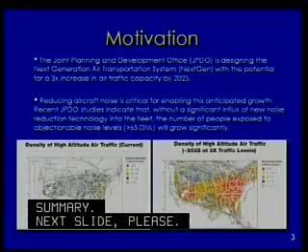In the way of motivation, as you well know, JPDO is charged with designing the next generation air transportation system, NextGen. And one of its goals is the potential to increase the capacity of air traffic by threefold. Now, clearly, an important enabling technology for that is reducing aircraft noise to enable this growth. Without it, in fact, JPDO studies indicate that the number of people exposed to objectionable noise in and around airports will steadily increase.

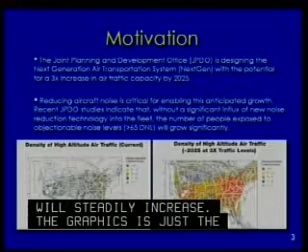The graphic is just a visual representation of air traffic density. On the left is the current picture, on the right is if we have the 3 times growth. All of these planes in the air must take off from an airport near you and land in an airport near you.

So you see that noise is going to be a critical issue. Next slide, please. Before going on, because we'll often be talking about noise levels in dBs, we thought it might be important to discuss what we mean. And because there is some subjectivity in noise, very well-defined metrics have been identified and enforced that define the effect of the noise on the community.

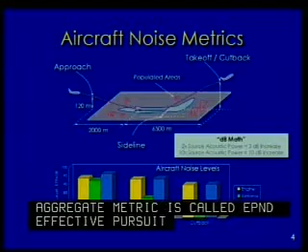They take into account the spectral content, the annoyance rating, duration, and this aggregate metric is called EPNdB, Effective Perceived Noise Level, dB. For the purposes of community noise regulation, there are well-defined so-called certification points that any commercial aircraft flying must meet in order to be certified. And these are so-called approach for landing, takeoff / cutback, and sideline. There are precise trajectories, distances, and durations for these that every aircraft must follow. And the noise is measured, expressed in dB.

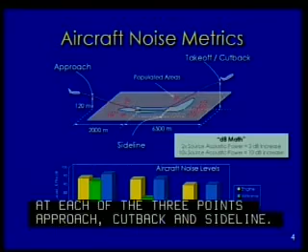The chart on the bottom, concentrate on the blue bars. Those are really representations of what, say, would be measured at each of the 3 points: approach, cutback, and sideline. In the subsequent charts, we'll often talk about cumulative margins, or margins, more specifically. What we mean by that is for every class of aircraft, there are FAA rules, actually ICAO rules, International Civil Aviation Organization rules, that set limits on the noise that a given aircraft can make.

The margins are what the measured level of that particular aircraft is at each cert point, subtracted from the noise regulation level. Generally, you want to be below that, so that's typically a positive number. And then you do that for all 3 certification points. You can express that as a cumulative metric. Often that's what is done. But sometimes for the purposes of identifying trends, you could also look at an average. And both the sum and the average are straightforward arithmetic sums of the dB levels.

An important thing to remember about dB is that it's a logarithmic scale, which means if you double the acoustic power, you double the number of engines, the noise will go up by 3 dB. If you want it to go up by 10 dB, you need 10 times the power. So clearly, to make dramatic changes, you need to do a lot, and the reverse is true also. To reduce significantly the noise, you need to do a lot of work. Next slide, please.

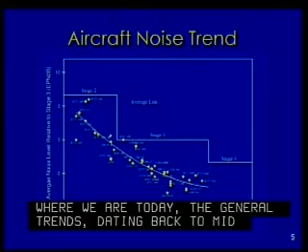This graphic is meant to show where we are today, the general trends, dating back to mid-60s to about mid-2000. Not every aircraft flying is posted there, but a representative set is. And the vertical axis is this average margin relative to stage 3. The stages are the noise regulations, and stage 3 was really the ruling rule from the mid-70s to about mid-2000. Clearly, significant progress has been made over the years, and airplanes are much quieter than 20 years ago. But also, it's clear that the trend is leveling off. And why is that? Next slide, please.

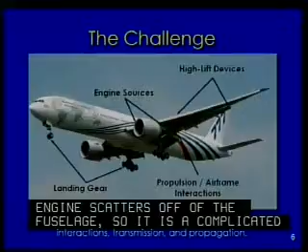One main problem is that it is a very complicated problem. Individual sources are highly complicated, involving interactions of flow with every part of the aircraft that makes noise. And then the complicated interactions that the sources could have: the engine slung under the wing, the jet plume is affected by the wing downwash. The noise radiated from the engine scatters off of the fuselage. So it is a complicated problem, and so it's a worthy challenge to rise up to. I think the caption at the bottom really captures it. The aircraft noise is a complex amalgam of sources, integration, interactions, transmission, and propagation.

Next slide, please. Against this background of where we are, the challenges we're facing, the Subsonic Fixed Wing Project, part of the 4 fundamental aero programs, has set itself goals to enable the JPDO vision. And there are goals in noise, in emissions, and in performance. And we have identified two generations of aircraft. If today's aircraft are labeled Generation N, then N+1 is the next generation. Still a tube and wing, would look like a, say, 737, but more advanced. And then the follow-up generation, N+2, is something that would probably be radically different.

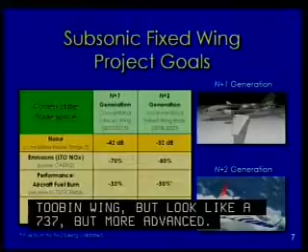I'm not going to talk about all the goals of the Subsonic Fixed Wing Project. We'll just concentrate on the noise. But the point to make here is that the levels, the targets you see, whether it's for N+1 or N+2, are meant to be the corners of the trade space.

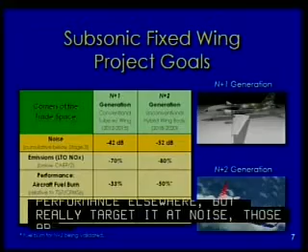If you were to optimize an aircraft just for noise, have acceptable performance elsewhere, but really targeted at noise, those are the targets we think are achievable with the technology that is already in the pipeline and what is over the horizon. These are cumulative margins relative to stage 3. So let's just look at an average, which means for N+1 we're looking at 14 dB and for N+2 17 dB. Next chart, please.

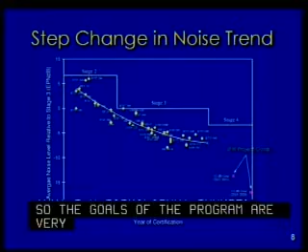They're plotted against the current trends. Clearly a step change in the way we do things. And remember the dB math, that's a significant change. So the goals of the program are very aggressive, but I think that's the kind of thing that is needed to achieve the JPDO vision. Next slide, please.

A little bit more detail. This is an in-house NASA study. The orange bars are margins of a best-in-class, if you will, single-aisle aircraft, something like a 737. In fact, this one is an A320. It shows where it is today relative to stage 3 and on a cumulative basis.

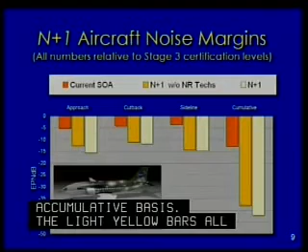The light yellow bars all the way to the right are our vision of the replacement for the 737 or A320 that brings the best of the technologies available today or in the pipeline. And you see that it's a significant change.

Technologies having to do with better airframe design, so-called ultra-high bypass ratio cycle engines, and some additional airframe and engine noise reduction technologies. Together, the so-called N+1 achieves the 42 dB goal. In fact, the goal was set on the basis of this study. Next chart, please.

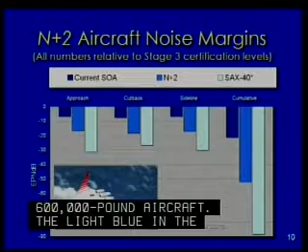Somewhat more nebulous is the N+2 design study. The dark blue, the current state of the art, is a 777, a 600,000-pound aircraft. The light blue in the middle is our vision of a so-called hybrid wing aircraft that would have significant, again, improvements over N+1, cumulatively about 52 dB.

We'll talk about the hybrid wing in great detail later, but principally it is the way the propulsion system and airframe are integrated and the significant shielding that you would get from that integration that buys you the benefits.

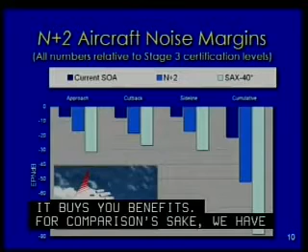For comparison's sake, we have also plotted the SAX-40. That was the aircraft that was designed by the University of Cambridge and Massachusetts Institute of Technology consortium over the course of 3 years, what they called a functionally silent aircraft that would be blending with the background noise. So it was highly optimized for noise.

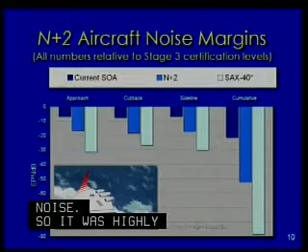And there were tremendous technical challenges that had to be overcome. They were way down there at about 86 dB cumulative. They had a much longer time horizon than what we are proposing to do. So we are naturally a little bit more conservative, and hence the goal is at 52. Next slide, please.

Our research plan, this is really kind of a common template between all fundamental aero programs, perhaps the entire aeronautics program. It is a layered approach that starts at the basis with the fundamentals, really understanding the physics of the problem and addressing the issues that one has, whether it's prediction, mitigation, or diagnostics for that matter.

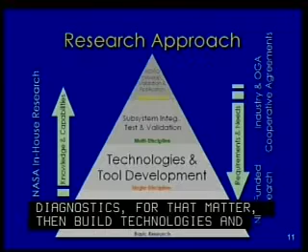Then build technologies and tools at the discipline level, in this case acoustics, that address those needs, and then push that up to the next level, integrate with multiple disciplines, and validate primarily the prediction tools that we are developing, but also technologies, and ultimately lead to a multidisciplinary analysis and optimization. The knowledge and capabilities flow up, the requirements and needs flow down, and ideally this is a continuous loop so things improve constantly.

The research effort is too big for just one entity, so in-house we do what NASA does best, fundamental, leading edge research, but we also work with our industry and academic partners to bring in the talents and the capabilities that we may not have in-house. So we have NRA-funded research, primarily with universities, but also with some industry. And we also have developed and continue to develop partnership opportunities with industry and other government organizations.

And while NASA in-house research is really at all layers, the NRA-funded research tends to be at the fundamental and the discipline level, although it can creep up to the next layer. And the cooperative agreements are primarily at the multidisciplinary and system level approaches. Next slide, please.

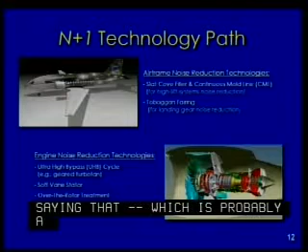Okay, we talked about the goals, 42 dB relative to stage 3. Here's the technology path. Basically taking the best airframe design today, which is probably a 777 with the best high lift system, and scale that down to the 737 class, assuming you can maintain the noise benefits of that. Add some technologies, some of which we'll talk about, to further mitigate noise from the high lift system, from the slats, from the flaps, and from the landing gear.

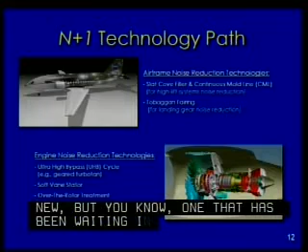Then mate that with a new propulsion cycle. Well, not new, but one that has been waiting in the wings, but I think it finally has its time in the spotlight. That's the ultra high bypass engine. Basically, you slow down the fan tip speed. This way, you reduce fan noise. You also reduce jet exhaust velocities, a notoriously difficult problem to mitigate. So you get significant benefits from the cycle alone.

But for insurance purposes, we also add some fan noise reduction technologies, specifically, in this case, soft vane stators and over-the-rotor. We'll talk about the soft vane stators later. Both of those technologies, in fact, have NASA patents pending on them. So this is our technology path for N+1. Next slide, please.

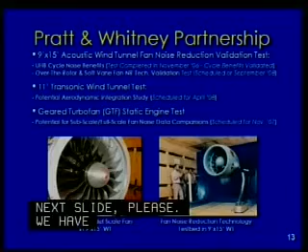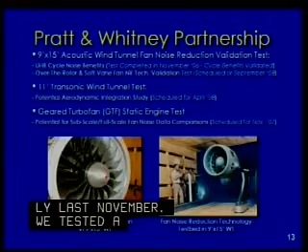We have formed partnerships in the past, and we are continuing to develop partnerships now with industry partners who can help us push the front along on these technologies. Specifically on the propulsion side with the ultra-high bypass, we had studies that we did jointly with Pratt & Whitney. Last November, we tested a scale model cycle of their version of a UHB, which is called the geared turbofan. It was tested at subscale, in fact 22-inch scale in wind tunnel, and basically demonstrated the noise reduction benefits of

that cycle. We are planning next September to do the test of the over-the-rotor and the soft vane technologies to buy us the extra margin we want to have with the fan noise reduction. There's potential now to work with Pratt & Whitney, still in negotiations with them, to do some integration studies in the wind tunnel. And also they have on schedule to do a ground test of the fan system for the geared turbofan. So there may be an opportunity for us to work with them and compare the scale model noise data with the full scale to see if that connectivity is there the way we think it is.

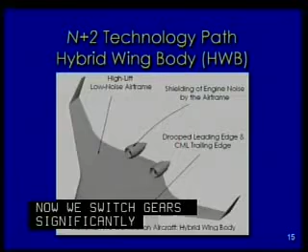Next chart, please. Now we switch gears significantly here to the N+2 generation of aircraft, envisioned to be hybrid wing-body concepts, and only one notional concept here is shown. And compared to the conventional configuration that you've seen pictures of up till now, this represents a paradigm shift in what is possible with aircraft noise. Most dramatically, you see the engines can now be moved from the bottom of the aircraft to the top. And this introduces the potential for shielding of propulsion noise sources.

So clearly, with the engines in the location that they're at now in this graphic, you see the potential for large shielding of the forward radiated propulsion noise sources. It'll be a challenge to obtain shielding of the aft radiated sources, and so that is going to be a large focus of continuing work. It also changes the way the aircraft flies and the way the high lift system is integrated into the aircraft because of the blended wing body shape.

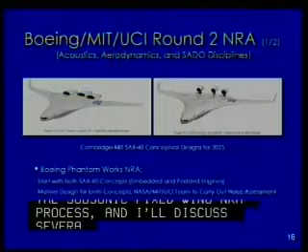There's that blending of the airframe components as well. Next chart, please. We've just concluded round 2 of the subsonic fixed wing NRA process, and I'll discuss several of the awards there that are very important in the acoustics area and directly related to this N+2 technology path.

The first award that was just completed negotiation and awarded just 3 weeks ago is led by Boeing Phantom Works. They have MIT and University of California, Irvine as subcontractors. And we're beginning to integrate a large team from NASA in both the acoustics disciplines, the aerodynamics disciplines, and the system analysis and design optimization discipline as well.

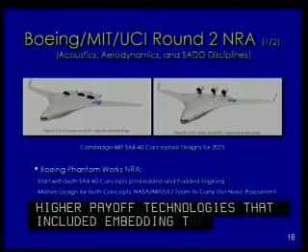The Boeing team was able to take advantage of that same Cambridge MIT Institute work that was done on the Silent Aircraft Initiative over a period of 3 years. And they'll start with these 2 aircraft concepts that are shown. On the left, you see the SAX-40 design with the higher risk, higher payoff technologies that included embedding the engines in the airframe. On the right, you see a lower risk, but still a dramatic step change in technology and noise reduction potential. It's the podded version of this aircraft.

The Boeing team will start with these 2 concepts, and over the first year, they will go into much greater detail of the design of these concepts, closing out the aircraft design in 1 year. They will look at technology suites to add to these aircraft, and by the end of the first year, working together with NASA, they will plan in year 2 and year 3 a large-scale, high-fidelity wind tunnel test.

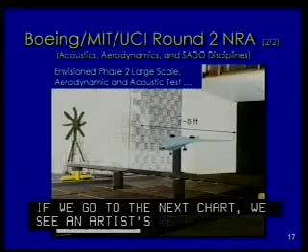If we go to the next chart, we see an artist rendering of what is envisioned for that phase 2 large-scale, high-fidelity wind tunnel test for both aerodynamic as well as acoustic characteristics of this type of aircraft. We see the 14 by 22 wind tunnel with this concept ready for testing there. We have far-field microphones deployed, the latest phased array technology to image the acoustic sources.

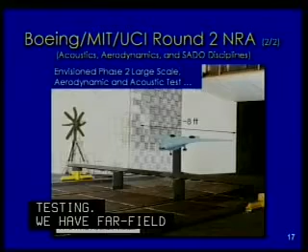This is going to be a big challenge. As we bring the airframe noise sources down and the engine noise sources down, it's going to take a greater resolution of measurement technology to properly characterize these. And so this is envisioned for the phase 2. It'll occur in 2010 if we proceed to that stage. Next chart, please.

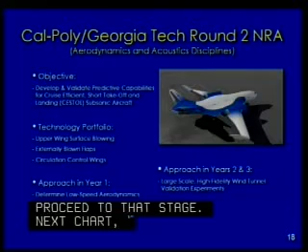Along a parallel path, a second team led by California Polytechnic with Georgia Tech as subcontractors are also proceeding. In this case, they're going to be focusing on that metric that was listed in the subsonic fixed-wing goals for field length, going after the cruise-efficient, short takeoff and landing subsonic aircraft concept. And you see, again, a rendering of that type of a concept. They'll look at the technology portfolio, including upper surface blowing, externally blown flaps, circulation control wings that enable this short field takeoff.

And again, in year 1, they'll be putting together the tool set to design and optimize this type of configuration. A key is going to be how they predict the acoustic characteristics of these technologies integrated into a complete aircraft concept. And then, like the Boeing-led concept, in year 2 and 3, they'll be putting together plans to do a large-scale, high-fidelity wind tunnel test of this type of a concept. In this case, they're aiming towards the National Full-Scale Aerodynamic Complex at the NASA Ames site.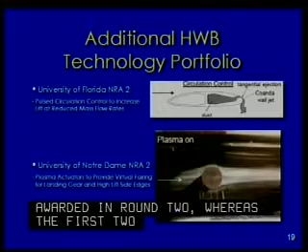Next chart, please. A different set of concepts were awarded in round 2. Whereas the first 2 focused on the complete aircraft concept and technology, these are going to focus more on individual technologies, which we think are very promising and can really change the way aircraft are designed and flown and impact the acoustic characteristics. The first is at University of Florida. It's going to be focusing on circulation control.

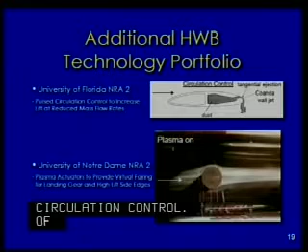Of course, this technology can dramatically increase lift coefficient and therefore enable lower speed takeoff and landing, and also increase the separation between the aircraft and the community below, and change the airframe sources as a result of that. In particular, they're going to be looking at pulsed circulation control or unsteady circulation control, which can increase the lift while reducing the mass flow requirement through the circulation control jet.

And of course, they're going to be developing a very high quality aerodynamic and acoustic data set, which has not been done before. And that's going to be a very important step forward in understanding this technology. The second one will be done by University of Notre Dame, and it's on plasma actuators.

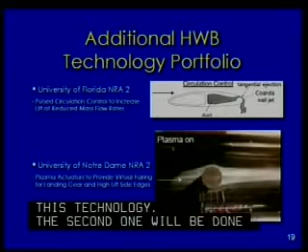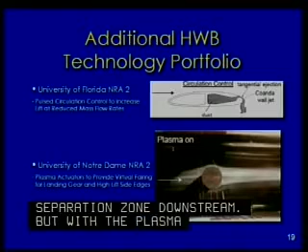You see there in the photograph to the right a cylinder in a wind tunnel, and you see smoke visualizing the flow field, flow from left to right. Now normally, flow over a cylinder, you would see a large separation zone downstream, but with the plasma actuators on, the flow is, you see, smooth over the cylinder, and there's no large separation region.

And so plasma actuators hold the promise to provide virtual fairings for airframe noise components like the landing gear and the flap side edges. We think it's, again, a very promising technology which has multiple applications, and we're looking forward to this work as well. One of the keys here is to push the technology of plasma actuators to higher Reynolds number, more realistic applications. Next chart, please.

So we're very excited about those NRAs and the potential for what they can do in the N+2 category. But now I'll hand it back to Dr. Envia for our in-house research. Thank you, Russ. Russ did a pretty good job of covering some of the partnerships we have formed and some of the key NRAs that address the N+2 technology development. Equally important, of course, is what we do in-house, and the kind of work that NASA is uniquely capable and qualified of doing.

Our in-house research, as I mentioned earlier, it's a formula that has worked well for us in the previous program, so we decided to stick with it, which is a three-pronged approach to addressing noise research as it relates to aircraft. So the diagnostics, understand what is it that you're trying to model and mitigate, then bring to bear noise prediction capability that might exist or you develop. And so it's a combination of improving existing capabilities, but also developing new ones as need arises.

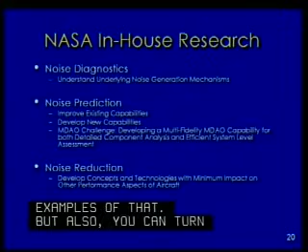If you're studying a specific component and you can afford the computer resources and time, you can study that in a great deal of detail, and we'll show some examples of that. But also you can turn the dial to something that perhaps is not as high fidelity but is efficient, so you can do a system level analysis and you can study a number of systems in reasonable amount of time.

Ultimately, of course, the diagnostics and prediction are going to help us devise noise reduction technologies that, again, the idea is for them to have minimum impact on the other performance aspects of the aircraft. We have traditionally worked these in a synergistic manner, so there is a give and take and a continuous improvement loop between these. Next slide, please.

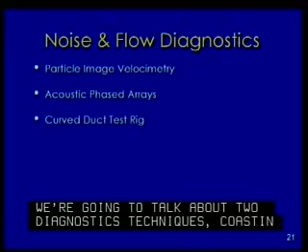I'm going to systematically go through and just show highlights. Just like the entire presentation, this is really only a highlight of what we do, but I think these are what NASA is doing very well. In fact, in some cases, at the leading edge of that work. I'm going to talk about two diagnostic techniques, so-called particle image velocimetry and also acoustic phased arrays, but also talk about a new capability we're developing at NASA to really understand liner physics.

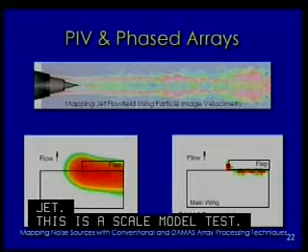Next slide, please. On the PIV, particle image velocimetry and phased arrays, the top graph shows an actual visualization of the turbulence in the jet plume of a coannular jet. This was a scale model test. And basically, by seeding the flow with particles that are small enough that they don't affect the flow, but are large enough to reflect laser light, and then by very complicated image processing, you can basically develop a snapshot in time of the intricacies of spatial distribution of a major source of, in this case, jet noise, which is turbulence.

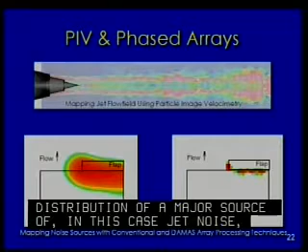And this technique is now pushed into the time domain. There have been recent tests at NASA where you can actually sequence this in time and trace the evolution of turbulence in time, which is equally important in jet noise research. And we have also attempted to do PIV for turbomachinery behind fans to understand the evolution of turbulence from the fan rotor as it impinges on the stator. On the bottom is a graphic of another area that NASA is very good at, phased arrays.

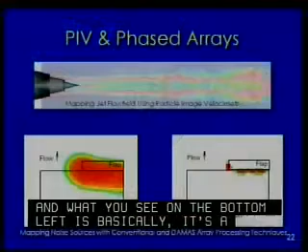And what you see on the bottom left is basically a main wing and a flap, and the noise source is the discontinuity between the two, the edges that flow gets into, and you get vortex shedding and noise production. Using conventional methods of so-called beamforming, which is the analysis of the phased array data, which is, after all, an acoustic camera, it is not very clear what the primary source is.

But a method developed at NASA called DAMAS, the deconvolution method, actually filters all the extra noise out, and you can focus on the real source, which is the flap side edges.

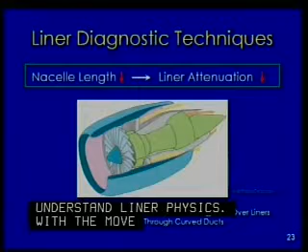Next slide, please. On the diagnostics, I'm going to talk about now a set of unique capabilities we're developing at NASA to really understand liner physics. With the move toward larger diameter engines, UHBs, the nacelles need to be shorter because of the weight consideration. That reduces the real estate that you have to apply liner. So understanding the liner physics so you can optimize it, take advantage of the minimized real estate is very important.

What we are doing in this program, we are developing two sets of unique capabilities to address grazing flow effect on the liner. By that I mean you can measure the liner in static condition. It will have certain performance, certain impedance characteristics. You put flow over it, things change. And of course, there's flow inside the engine, so it's important to understand the effect of the grazing flow.

We're developing a capability, actually two capabilities, that address measuring the performance of a liner subject to grazing flow for realistic flow conditions, realistic frequencies, and essentially realistic scale. One, the so-called grazing flow impedance tube, is a facility that allows you to really, under very controlled environment, look at the performance of the liner, subjected to different boundary layer growth, send acoustic waves from upstream or downstream, and understand what the liner is doing.

What this capability does not afford you is to put realistic mode content, the modes inside the engine. These are acoustic components from the sources. For that, we are developing a different capability, the curved duct test rig, which allows you to go the next step, put more realistic modal structure for the noise. Of course, the conditions are not as controlled as the first facility, but together they provide a powerful capability. Please roll the tape.

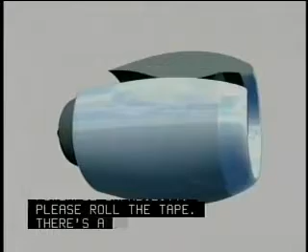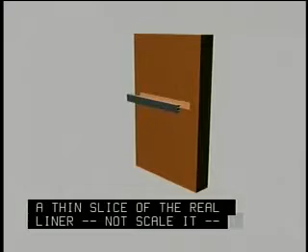There's an animation of the two facilities. First, typically where you would put liners are in the inlet or in the exhaust duct and the bypass duct. So the idea here is it's a graphic representation of taking a thin slice of the real liner, not scaled, and then put that in the grazing flow impedance tube for testing purposes. The black knobs upstream are speakers. You can dial in the kind of noise feature that you want, and the wires represent leads to the microphones where you make measurements. You can interchange different pieces to control the boundary layer growth.

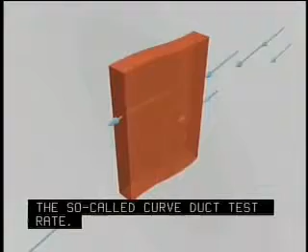That's the grazing flow. The one that takes you the next step up is the so-called curved duct test rig. Basically take the real section of, say, a full scale for a regional jet. Just unroll it, but maintain in the axial direction the curved nature of the duct. Then you can put the samples of the liner with some foam backing in there and make detailed measurements under realistic flow conditions and realistic frequencies. Both of these facilities are essentially unique. My understanding is that you have external customers already lining up to make measurements in those.

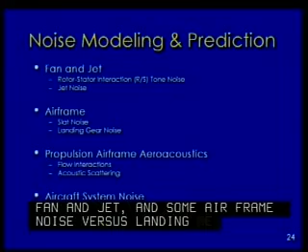Next slide, please. On the modeling and prediction, I'm going to again step through only a handful of areas, but I will sample capabilities that are purely computational, capabilities that are a hybrid between computation and analysis, and capabilities that have to do with basically empiricism. We'll talk about the top two bullets about component prediction, fan and jet, and some airframe noise sources like slat and landing gear. We'll talk about propulsion airframe aeroacoustics, two kinds of interaction, flow interaction and acoustic surface interaction, scattering. And then we'll close with the real challenge, aircraft system noise prediction.

We'll walk you through the current capability, Aircraft Noise Prediction Program, ANOPP. You probably have heard that acronym before. And then we'll also introduce the future ANOPP 2, a new framework that allows this variable fidelity capability that we talked about earlier. Next slide, please.

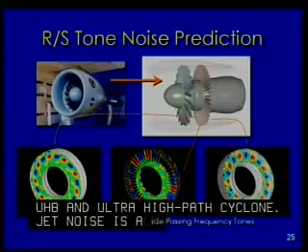Here's an example of basically a direct computation of fan noise. For a UHB, an ultra-high bypass cycle, jet noise is almost a non-issue. So fan noise is the dominant source. So understanding fan noise is critical. And here's a calculation that takes into account the real geometry of the rotor, real geometry of the stator, and gives you essentially a field solution. You know the noise field everywhere.

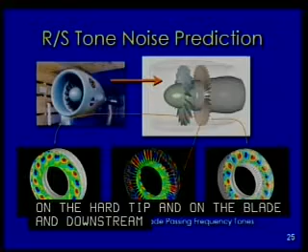On the left is the sound field upstream of the stator. That's the brown blade row. In the middle is the unsteady pressure distribution on the hub, tip and on the blade, and downstream is the wave propagating downstream. If this was animated, these patterns would be rotating and corkscrewing forward or aft. These are the so-called modes that we talked about earlier.

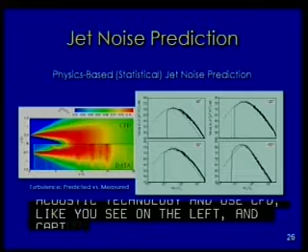You basically do a computation using CFD, like you see on the left, and capture the source of noise, namely turbulence, distribution of turbulence kinetic energy, integral length scales, and what have you, and then use that as input to a very rigorous analytical model of the noise that solves for the noise radiation given these sources. What you see there on top is the CFD prediction for turbulence in a jet plume, and the bottom is the data. Obviously improvements need to be made, and they continue to be made.

On the right is the prediction. It's a bit difficult to see, but the idea is that the predictions are pretty close to the measurement. The angles are measured from the axis of the jet. 180 degrees is downstream in the jet plume, 0 degrees is upstream. So you don't really expect to get a very good comparison upstream because there is shielding from the nozzle and all that we're not modeling here. But downstream, where we think this should work, it does work.

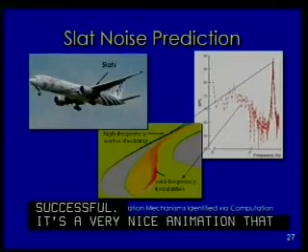By knowing what the source is, you can design noise reduction technologies that address those specific sources, and they've been very successful. Unfortunately we don't have it here, but there's a very nice animation that shows the so-called slat cove filler that mitigates the slat noise. But here's an example of the synergy that we talked about.

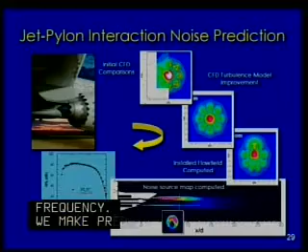That whole circuit there is a very fruitful interaction between experiment and prediction capability, but it's also intensive. It takes about 2 years to go through that circuit the first time. Now we move on to making improvements in the noise prediction method so they can handle greater range of directivity, greater range of frequency. We make prediction improvements in the basic flow field measurement as well. And then downstream, we look at making use of unsteady methods to improve certain regions of the flow field. So this is, again, a snapshot of 2 years that we will then build on in the future.

Next slide, please. That was one example of a flow interaction. Another type of interaction is acoustic scattering, where propulsion noise, for example, is produced at the source and then it radiates out of the engine and it begins to interact with an airframe, and it can either be reflected or it can be shielded. And so in this image here of a prediction being developed of an N+2 configuration, you see the propulsion noise sources being simulated on top of the airframe and then interacting with the airframe, being shielded by the airframe.

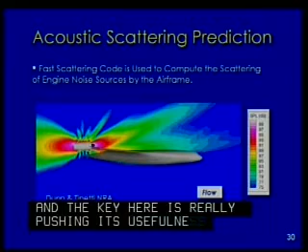This is being done on an NRA, round 1 NRA. It's a fast scattering code that is under development. And the key here is really pushing its usefulness to a broader range of frequencies and really working on the computation time. It's still a very computationally intensive process, and to make it more usable, more realistic, we've got to work on that computational requirement. Next chart, please.

You've seen now the components being predicted and some of the interactions being predicted. Now, the next challenge is to integrate them into a complete aircraft system noise prediction method. ANOPP, Aircraft Noise Prediction Program, has been a NASA-developed system noise prediction code for over 30 years. And it has been a workhorse, very good at what it does. So I'll say a few words about that and primarily focus on the step change to what we need to go to in the future, all right? And hence the name ANOPP 2. And of course, as we get to this aircraft system noise prediction capability, that's our direct link to MDAO.

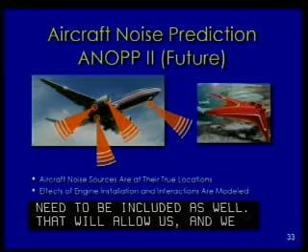That will allow us, and we must, venture outside then of the experience base. Again, the ANOPP paradigm was based on the conventional configuration and was developed to be quite good at that configuration. But it's largely for evolutionary changes of that configuration. To break out of that paradigm needs a new aircraft system noise prediction method, ANOPP 2. Now we'll go into a little more detail in the next chart as to this paradigm shift.

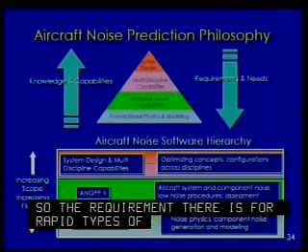But if we're going to address these types of requirements, we need the high fidelity codes or the products of those high fidelity codes, which are at the bottom, the research codes. These are of increasing fidelity. And so ANOPP II is going to have the very tough job and challenge of being that middle in transferring that knowledge and that high fidelity prediction capability into a usable tool for system noise design. Next chart elaborates more on the magnitude of this challenge.

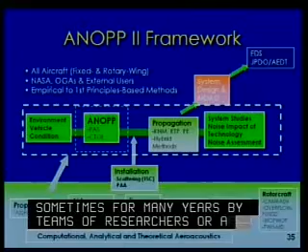On the bottom there, the half is that wide base, the foundational capability. These are most, not all, of our high fidelity research codes that have been under development sometimes for many years by teams of researchers, or are new codes that are in the process of being developed. These codes, again, are typically research codes, high fidelity, large computational resources. You see there in the middle, beginning that bridge, the installation effects that are being addressed by sets of codes.

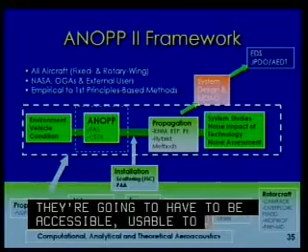In the middle there, around the porous boundary, the dashed boundary, is the framework for ANOPP II. All of these high-fidelity codes are going to be linked into that ANOPP II framework. They're going to have to be accessible, usable to that ANOPP II framework. ANOPP, the old ANOPP, still resides within that ANOPP II framework as a low-fidelity component of ANOPP II.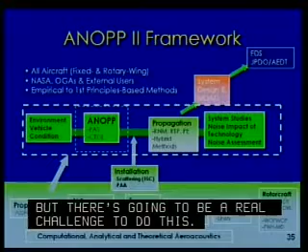But the installation effects will be added, the improved propagation tools will have to be added to work in this framework. But it's going to be a real challenge to do this. And again, to provide a usable tool to system design and MDAO requirements and then on up to EDS requirements. So this is going to be a great challenge. Next chart, please.

And we want to give a picture of ANOPP, the capability of ANOPP as it exists today with some of these improvements that have begun to be integrated into ANOPP. So we'll watch a simulation here. This is a demonstration of ANOPP combined with a propagation tool, one of the propagation tools.

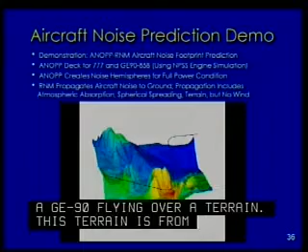It's a simulation of a 777 with a GE90 flying over a terrain. This terrain is from the U.S. Geological Survey. You can download it. ANOPP creates the noise hemisphere, and then RNM propagates it to the ground. And so you see the high noise levels in red, the lower noise levels in blue as the aircraft flies along this track, descending into the canyon and then gaining altitude and flying out. The aircraft is just represented by a dot there, just for the purposes of this simulation.

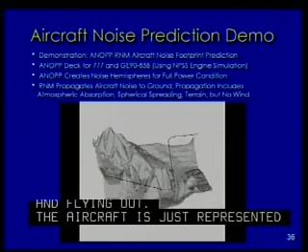So you can see the applicability of this to precision flying, precise studies of noise as aircraft approach or depart from airports or other applications of community noise interest. Next chart, please.

Now we move on to the third in the triumvirate of research, the noise reduction technologies. Well, again, we'll highlight a couple of key technologies, by no means all of them. So in the engine area, we'll look at the soft vane stator. Under the category of interactions, propulsion, airframe, aeroacoustic interaction, we'll look at the PAA chevrons. And then in airframe, we'll look at two noise reduction concepts, the continuous mold line and the landing gear fairings. Next chart, please.

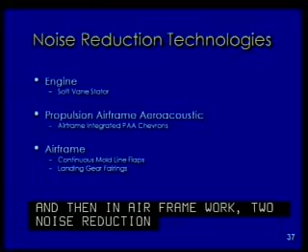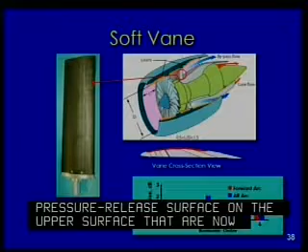The soft stator vane addresses that rotor-stator interaction which Ed addressed earlier. It goes on the stator vane in the bypass duct. And you see in the photograph to the left, it has a perforated surface or a soft pressure release surface on the upper surface. We're now looking at the cross-section of the stator vane. Inside the stator vane, there are cavities of varying depth, which give it a frequency dependence. And then the bottom surface, pressure surface, would be solid.

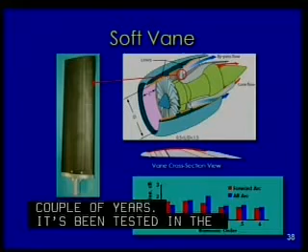This has been developed over a couple of years. It's been tested in the 4-foot low-speed fan facility. And a typical set of results is shown there in the plot, a solid 1 to 2 dB reduction. But what's very promising about this is that while it was designed for tonal reduction, reduction at the source, it also shows broadband noise reduction. And while it was intended to reduce aft-radiated sources, it also reduces the sources that are radiated out the inlet, the forward arc. So this is a very promising technology.

The next step is to move this to more realistic, higher speed fan applications, and that can be done in the 9x15 test of a UHB concept. Next chart, please. The PAA integrated chevrons.

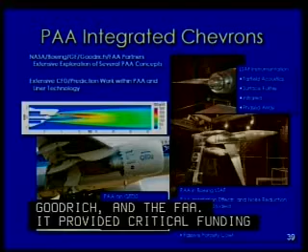This is a large story covering one of our recent partnerships. This started in 2003. It was a partnership between Boeing, NASA, General Electric, Goodrich, and the FAA, who provided critical funding to this whole project. And this part of the partnership addressed this idea of integration effects and how we could take a technology like chevrons that had been under development for many years and make it better, get more noise reduction out of it by understanding the integration effects between jet and pylon.

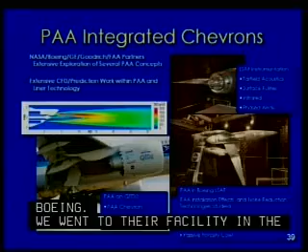And so we did a lot of exploration work. We did the best types of prediction methods that we could bring to bear. And you see an example of that, again, studying that asymmetry created by the interaction of the jet and the pylon. We then went to working technically with Boeing. We went to their facility, the low-speed aeroacoustics facility. This is a facility where we can do this type of system testing, where you have the fuselage, the wing, the high-lift system, and the jet exhaust. It's a very promising type of testing approach necessary for this understanding of interaction effects.

We studied a range of technologies, including a family of chevron nozzles that we hypothesized would improve their acoustic performance based on a favorable interaction between jet and pylon. And you see flying in 2005, the best of those nozzles, the T-nozzle, where the chevrons closer to the pylon have a stronger effect on the flow field. They're longer, they have more immersion, they create a stronger interaction, and that works favorably with the pylon and is clearly superior to the uniform circumferential chevrons.

Now you'll see a trend here. You'll see a theme which is very important. In this case, it's not just about the chevrons, but it's about what we gain from the system testing, all right? The subsystem, system level testing, where we're testing complete models, fuselage, wing, flap system, and propulsion source. You'll see that in the arrays that we talked about in the beginning of the presentation. We're headed towards higher fidelity, large-scale integrated testing where we can address the major interactions and the sources and achieve better understanding. And that relates again to the system level prediction methods, ANOPP and ANOPP2.

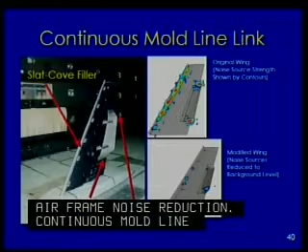Airframe noise reduction, continuous mold line link. Here we see a large-scale test in the 14 by 22 of a more realistic wing. This is a swept wing. It has a slat with a slat cove filler noise reduction concept, and you can see there the flap has been deflected, but it now has the continuous mold line link, eliminating those sharp edges.

Now this was a fixed concept. It didn't actually actuate, all right? It was meant to quantify the noise reduction potential of these sources. And on the right, you see the phased array imaging of these sources. In the top, you see the original wing without the noise reduction added, and in the bottom, you see that these concepts have proven their potential at reducing those sources by several decibels.

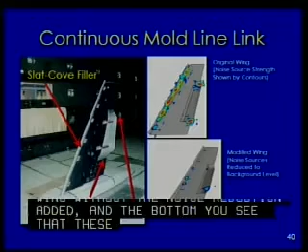So this is, again, one step further in the process of developing these concepts, developing the understanding, and then moving on to more realistic prediction and noise reduction applications. Next chart, please. Landing gear noise reduction.

While one team working with Boeing was working on the chevrons, another part of the NASA team, the airframe noise team, was working with Goodrich and Boeing on the landing gear concepts for this flight test. Again, this occurred in 2005, and it was a set of tests at both subscale as well as this full-scale flight application. We've talked about the landing gear and the complexity of the landing gear, the multiple bluff body shedding sources of the landing gear.

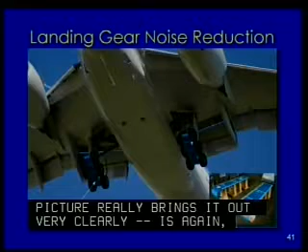This was an attempt at a partial fairing of the landing gear. Again, that balance between application realism and the desire to maybe fair the entire landing gear. And together with the subscale test, it showed good promise. I think what is most important about this is, and this picture really brings it out very clearly, it's again really motivating us to address these interactions, in this case, between one airframe source, the landing gear, and the other airframe source you see right behind it, the high lift system.

The high lift system deployed like this, through the potential flow effect, creates a change in the flow pattern over the landing gear. We have to address that. You can't do that just by a component test of the landing gear. And then the shedding of the vortices and turbulence from the landing gear is in turn impacting the flap source downstream of it.

And so this test really brought that out, the motivation to pursue that type of, again, system-level testing, more complex, more ambitious understanding of these interactions. Next chart, please. So we move to summary.

We hope we've reminded you that aircraft noise is critical to the future growth of the air transport system. People want to move, and they want to move more and more goods and services, and aircraft noise continues to be critical to enabling that growth. NASA, we continue to work closely with the JPDO, the FAA, to do our part to enable that future growth of the air transport system.

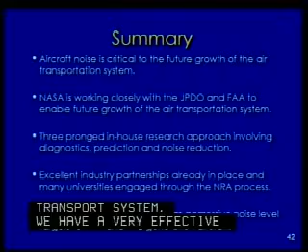We have a very effective three-pronged research approach involving diagnostics, prediction, and noise reduction. And in that three-pronged approach, and specifically in partnerships, we continue to enjoy and benefit from excellent industry partnerships and engage a number of universities through the NRA process. And finally, the subsonic fixed-wing project has moved out with aggressive noise level targets for both the N+1 generation and the N+2 generation of aircraft.